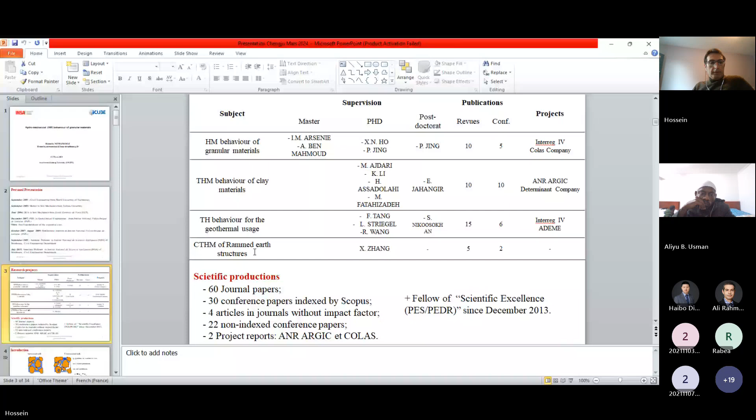So generally, coming back to my field of research, it's going to be around geomaterials, and as I told you, it's the thermo-hydromechanical coupling work. It should be mentioned that because of the interactions soil has with the environment and with structures, we can imagine the soil changes its state several times, moving from saturated to unsaturated state. The reason I'm doing all these couplings is because the soil is not going to remain at one state in its whole life, and these changes are going to be coupled.

If it's on the pavement, you can imagine vehicles passing through the pavement structure, rainy times with precipitation, or thermal variation all over the life of the soil. So if I'm imagining this soil is part of a pavement, I need to consider the hydromechanical behavior of the granular material. If it's part of an individual building with foundation inside clay soil, it's the hydromechanical behavior of clay soil. And if I'm using the same soil for energy storage methods, for example geothermal usage, it's the hydrothermal behavior. So it depends on the field, the demand, the subject we are treating - it's possible we don't need to consider the total thermo-hydromechanical coupled problem, so we choose one part.

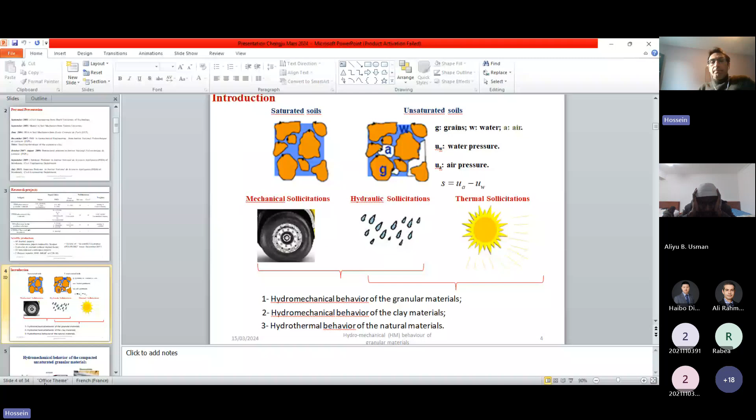So mainly for what I'm going to present today, I'm going to stay with the hydromechanical behavior of the granular material, so we're going to stay majorly on the pavement.

This slide, even though written in French, should speak to you, because in the pavement structure you have the first layer which is the asphalt layer, then going down you have the base layer, and if you want, the sub-base or sub-grade layer. Generally, this is the main idea of my presentation: you see problems mainly on the asphalt surface layer - rutting or surface cracking - and mainly you'd say this is because of the surface.

But truly, maybe it's not only because of the asphalt layer, but it can come also from the base or sub-base layer. Especially I'm talking about this water level that you can see, because of the rain that is arriving, no matter if you imagine your asphalt layer is permeable or impermeable, by the other side finally you can change the water level.

And if I'm going to put this water level up or down, you can imagine that you are changing the water content or the water state of your granular material. This is exactly what I want to talk about.

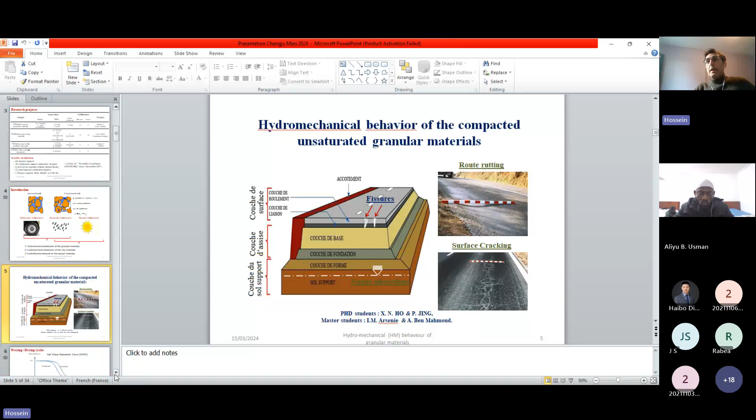So in this presentation, I'm going to show some works that we have done on this field, and it can help you to see at the end what I mean by all of these changes, and how we can consider it in the laboratory and then in the real scale, these changes of hydraulic behavior of the soil that are attached to the mechanical part.

So let's start the presentation.

For the first slide, maybe you know it, maybe you don't, but I need to start my presentation with this fact that the water content of the soil is changing all the time. This is related to something we call in the field of unsaturated soil, suction, the negative pore pressure. So it means that if your soil is saturated, you are somewhere here...

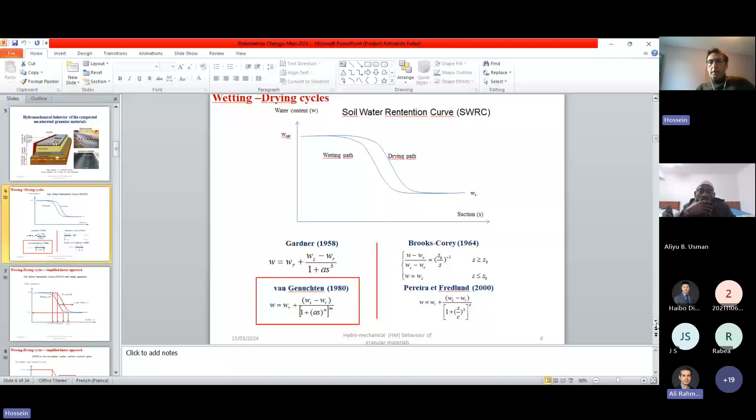Can you see my presentation or not? Just I need your... Yes Hossein, yeah we can see, although it's not the full slide, but we can see, yes. Okay so full screen, yes.

Now it's fine. So I'm saying that this water retention curve, the variation of water content with the suction, you can see that we are on the saturated state, and if we put the soil through its dried condition, you can imagine that you are moving first maybe on the drying path.

Another issue I want to talk about is that you may have something like a hysteresis phenomenon, where there is a difference between your drying path and your wetting path. It means that if I'm in winter and going through summer, I'm going to be on the drying path. But if I'm in summer going through winter, I'm going to be on the wetting path. So as all the seasons pass, the soil is also not going to follow the same wetting and drying path.

One point we need to consider, and this is the major difference between reality and what we do in the experimental laboratory, is that we do the things fully. But what I mean by fully is that you start fully from the saturated state and you finish by totally dried condition, and vice versa, you start from totally dried condition and finish by totally saturated state.

This is the main hypothesis I'm going to use, the extreme condition that I may have, because in reality maybe you are not totally dried or totally saturated. So you are going to be somewhere between these two, turning around between the wetting and drying paths in the middle of this path. So we are putting ourselves, when we do the things in laboratory scale, in the extreme conditions. So we may say that if it happens in reality in these extreme conditions, we may have such a problem later.

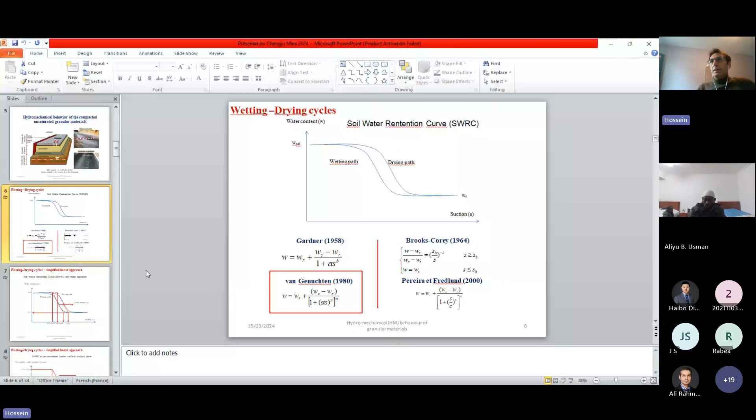But what I'm going to change in my work is that I'm going to take this water retention curve that we know very well in the literature, and I'm going to apply something like my own approach, my personal approach to this curve. There is a reason behind this. You will see a little bit later why I need to change, to modify things in this approach, especially for the granular material. So I know my curve on the wetting and on the drying path, especially I can

fit it, as I told you, with the Van Genuchten equation, or no matter the equation that you may need. But I changed this nonlinear variation to something like what I will call the linear approach. So instead of having the nonlinear curve, you will see that I'm going to replace my SWRC by three lines, three linear parts.

The first is for the saturated states. Then I have a very, let's say, steep slope here, that is going to be the major part of my SWRC, and then I will reach the residual state, and that's going to be the final state. So I'm going to divide my nonlinear curve into three lines for each step.

So the intersection of each part, I may need to define it. I will use something like S star to denote the intersection of the first and the second part, and I'm going to use SR, another letter, to define the intersection of the second part with the third part. And as you know, I am on the wetting and I am on the drying path.

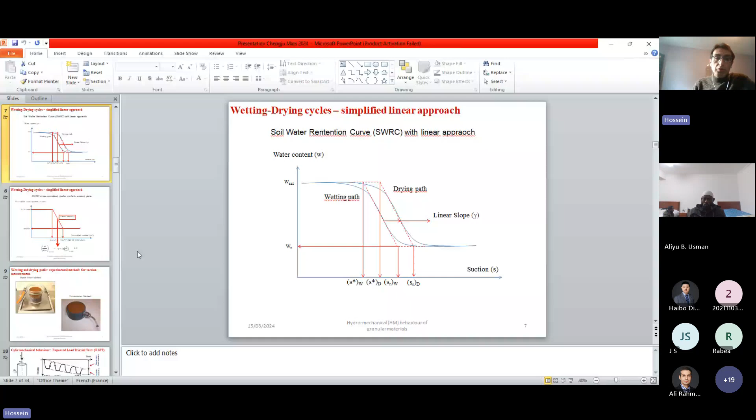Because if I'm going to replace my nonlinear curve of SWRC by three lines, and I'm going to change my representation curve to normalized water content based on normalized suction that is divided by S star, you can see that both curves of wetting and drying paths, they exist, the hysteresis exists. But if I change the representation to another plane, and I use normalized water content with the normalized suction, these two different paths, these two different curves, become unique in this plane, the normalized water content versus the normalized suction.

I know that you are good in math. You need to write your equation. It is a linear approach in logarithmic scale. And so your equation, especially this is constant, but I'm talking about this slope. You may need a linear slope that is going to come out from here. And so you can relate your normalized water content to your normalized suction with a slope that is called gamma. And so you write your equation, and it seems that with one parameter gamma, I am able to reproduce my water retention curve.

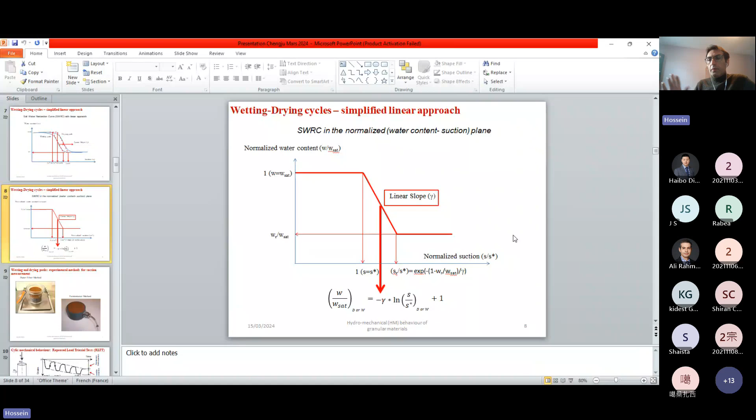And especially what is amazing about this approach is that you have one unique curve for the wetting and for the drying paths. Is it fine for now? Is there any question or not?

Is it fine? I don't see my Teams. Can you hear me? Yes, we can hear you, Hossein. Yes, we can hear you clearly and your slide. Yes. Okay, so is there any question? I may go to the next step.

And so if I have my theoretical approach, now we go to the laboratory and we do some measurements. The objective of this part is to show you that maybe my approach is going to predict the things well, and it can explain the hydromechanical behavior of my granular material. So I'm at the laboratory scale and I need to fabricate the samples to measure my SWRC. As I told you, I need to have some experimental results. Then I'm going to fit them with Van Genuchten and I'm going to replace the Van Genuchten equation by my linear approach. So I use these two methods and you will see the results that are going to be presented a little bit later.

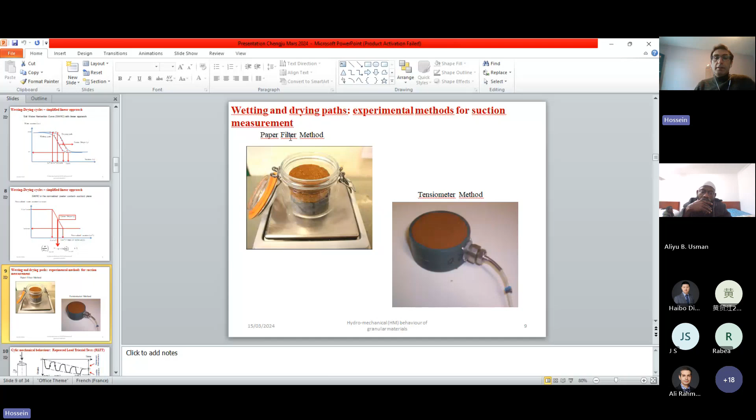This is for the SWRC, and we should not forget that another major point of this presentation is the hydromechanical behavior. So after, I'm going to fabricate the different samples at the laboratory scale for the triaxial test. I don't know whether you know this test or not, but we are able to do the repeated loading triaxial test. We can cycle our samples axially and radially in the triaxial condition.

Two behaviors are mainly known because of the loading of the cars on the pavement. It is supposed to be cyclic loading, and so this deformation is going to be plastic, the permanent deformation. You are going to have stabilization after several cycles. And there is another part of behavior: after several years, after several cycles, the granular material is going to show a reversible behavior. You load and unload your soil, it comes back to the same point, and the behavior becomes elastic or reversible.

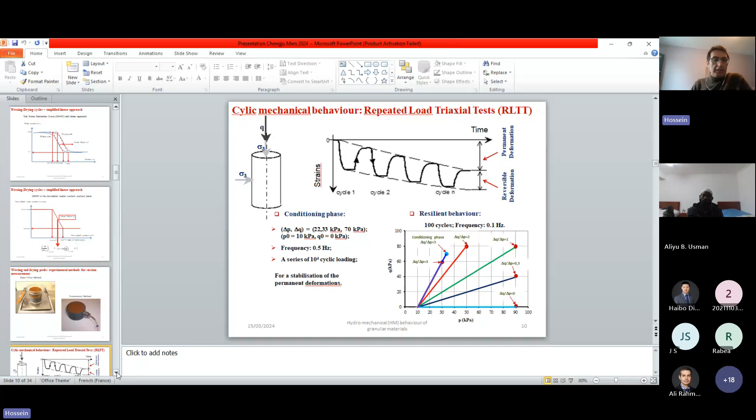The material that I'm using is a material in France that we know. Mainly, it is used for the subgrade soil. It is coming from the Missillac region, and it is the sand that we know very well in our laboratory. The maximum grain size is less than 31.5 millimeters.

The fine content that I'm going to show you is changing, because each time the material was sent to us, we did again, let's say, the geotechnical investigation on it, and so it happened that in 2 receptions of material we had 2 different fine contents. This was not what we were expecting, but it opened up having 2 different materials, and all the results that I'm going to show you come from 2 different times that the material was sent to us, and so we had 2 different materials with 2 different fine contents.

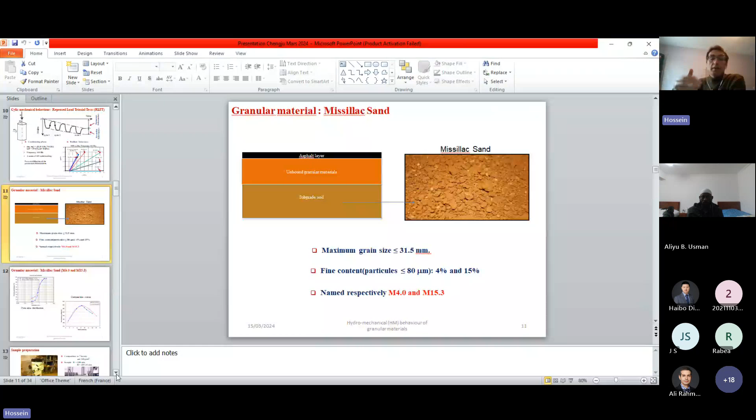First, I'm going to call the material with 4% of fines M4, and the second material, the exact fine content was 15.3. So you will see in parallel 2 different materials with 2 different fine contents, and the hydromechanical variation. Another point to show is the pore size distribution of the 2 granular materials, the 15.3 or 15% of fines, and the second is going to be M4 with 4% of fines.

Another curve that I can show you is the compaction curve, the variation of the dry density with the water content with the optimum point. This optimum point is important because it's going to be our referential initial state that I'm going to use in the other slides. So something like around 2 megagrams per meter cube or 2000 kilograms per meter cube is going to be our optimum dry density. And another point that maybe I'm going to come back to is the optimum water content. It's around, let's say, between 9 and 10, somewhere here. You will see that the material behavior is also going to be dependent on this optimum water content later.

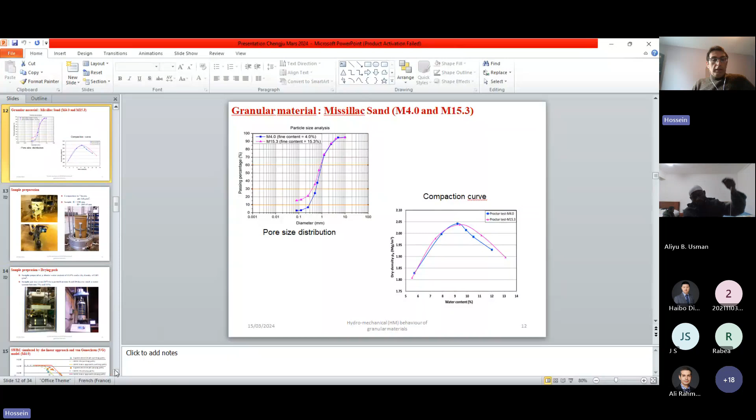So I need to fabricate, to prepare my samples at the laboratory scale. When I do the triaxial test, I need something like 150 millimeters or 15 centimeters of diameter and something like 30 centimeters of height. It's a big sample that I'm going to use for my hydromechanical behavior. The material should be compacted in 7 layers. It should be mixed well with the water, as I'm changing the water content. So I need to prepare several samples, and it was not easy to prepare the samples each time, so it was very time consuming.

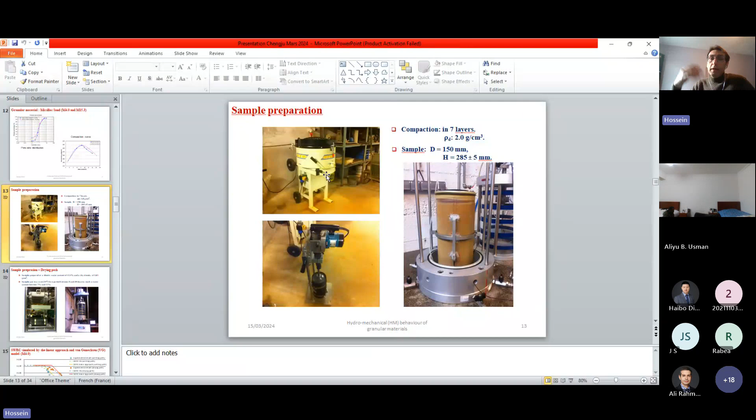And all of the things that I'm telling you are about the wetting path, and if I want to do it on the drying path, it is even more time consuming, because I need to prepare all the samples first at a water content around my saturated state, which is 12.3 in this work, with the dry density, as I told you, around 2 grams per centimeter cube or 2 megagrams per meter cube. And then I need to wait around 1 week to 3 weeks to dry back my samples, because I'm on the drying path, and to dry them we use an oven at 35 degrees to come back to a water content between 7 and 11. So for the wetting it was easier and faster, and for the drying we needed to wait between 1 and 3 weeks to have our final samples.

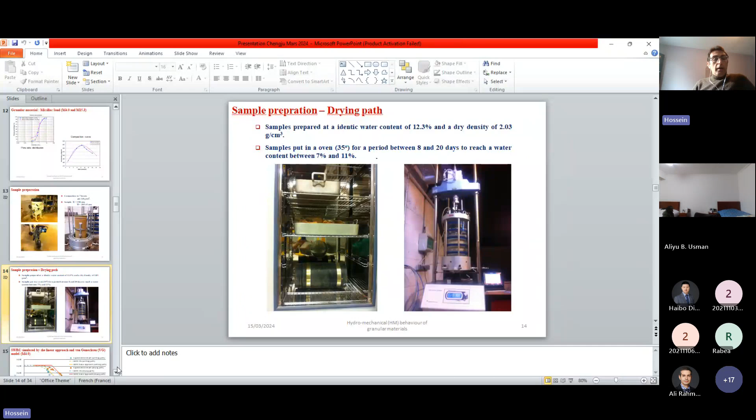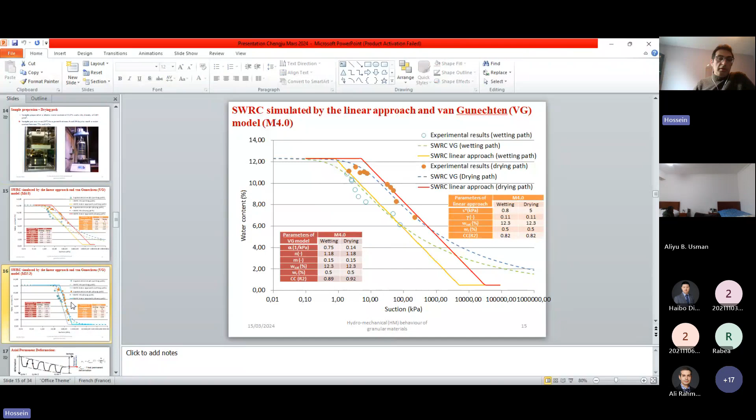This was the results for M4. I can do the same thing for the other soil with the fine content of 15.3, and so you can see the same: the experimental results, the approach with the Van Genuchten curve, and then the replacement with the linear approach, and you have also the gamma parameter, the main parameter that I use for my simulation. Another point also is that we are almost in the same range of accuracy for the Van Genuchten and linear approach. So even with the linear approach, for some curves we may have a better approximation.

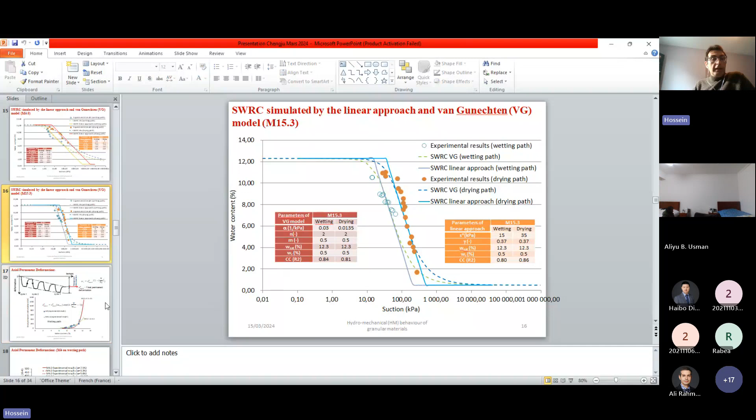Then the other stage is the mechanical behavior, which is coupled with the hydraulic state. As I told you, I'm going to divide my presentation in two parts. First, I'm going to talk about the permanent deformation, the stabilization after 10,000 cycles, this part. I need epsilon p max for the different water contents. For the rest of my curve, the variation with the number of cycles, I need a parameter f that I fixed for all of my curves. So this part of the equation will not be modified hugely in my simulations, but I need epsilon p max, which is dependent on water content.

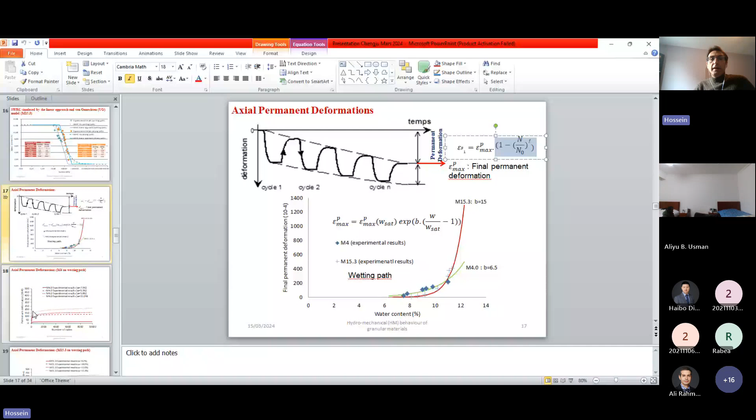Now stay again on the wetting path. This is the variation of permanent deformation. The stabilized state, this was the epsilon P max that I have shown you before. Now we have the variation of the curve with the number of cycles. This part of the curve that I told you is constant, I need to define the parameter f for all of the samples, and I can have this variation with the number of cycles. f was considered constant for all of the samples.

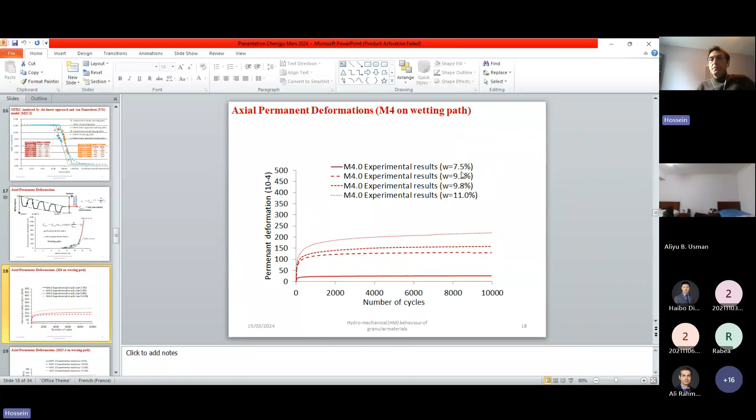So these are some experimental results, the variation of permanent deformation with the water content and the number of cycles. And I'm going to show the same results also for 15.3. I am on the wetting path for now. The difference of behavior, as I told you, for the lower water content, the permanent deformation of M4 is higher than M15.3. All of the things that I have told you, you can also see in this slide.

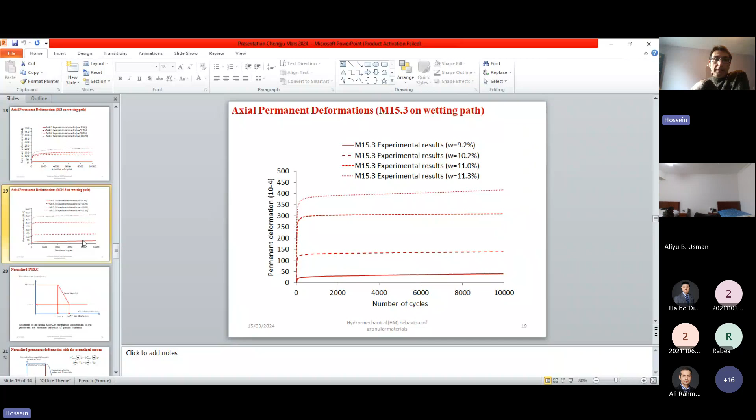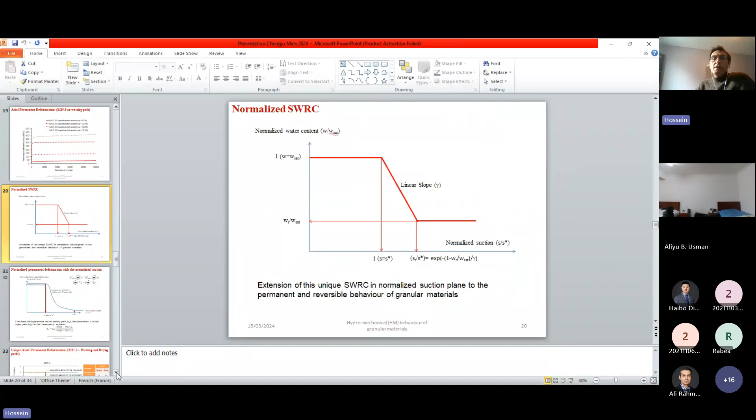Now I have my mechanical behavior, my permanent deformation behavior on the wetting path. As I told you, I want to do hydromechanical coupling, and another point was the behavior on the drying path. Now I want to find out what's happening on the drying path. And for this, I will remind you again of the linear approach that I proposed at the beginning of my presentation. It was the normalized water content on the plane of normalized suction, which becomes unique for both wetting and drying paths. And so we had a unique curve with a unique slope gamma that I defined before experimentally.

And so what I'm going to use is that my curve is unique in this normalized plane. If I change my plane to another normalized plane, which is now the normalized permanent deformation changing with normalized suction, I'm going to say that it is going to be the same on this plane. It means that I'm going to have a unique curve for wetting and drying paths if I define everything in my normalized plane. This time it's going to be the normalized permanent deformation based on normalized suction.

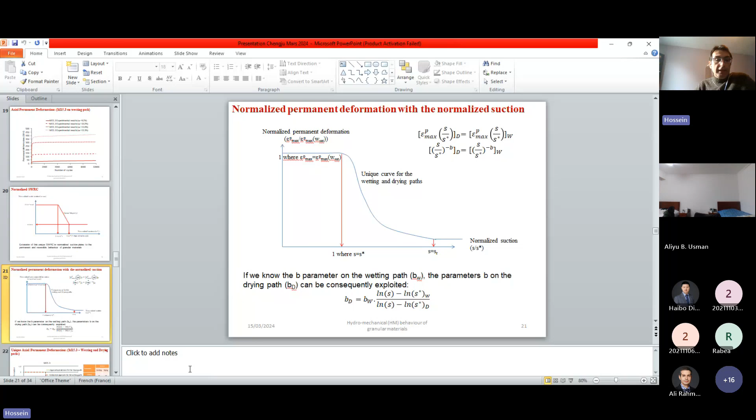Already I have shown you all of the things happening on the wetting paths. So I have this curve of normalized permanent deformation varying with normalized suction on the wetting path. And the objective is, by writing some simple equations, to take everything happening on the wetting path and define it on the drying path. And if I write my equation, I can see that if I know my B that I have shown you before on the wetting path, I am able to define my B on the drying path. And so if I have the behavior on one path, I'm able to define it on the other paths. And this is what I'm going to show you later.

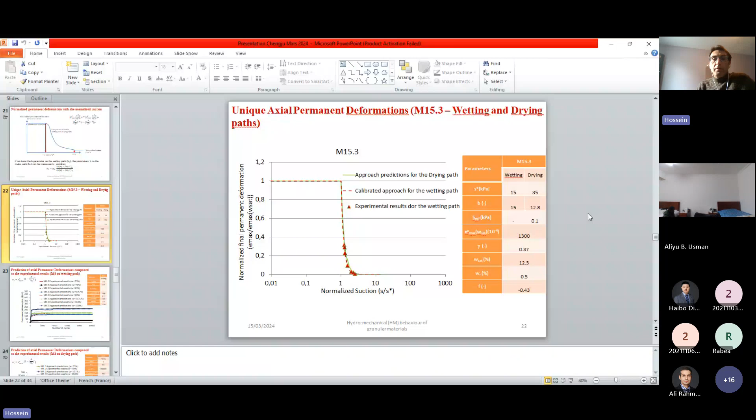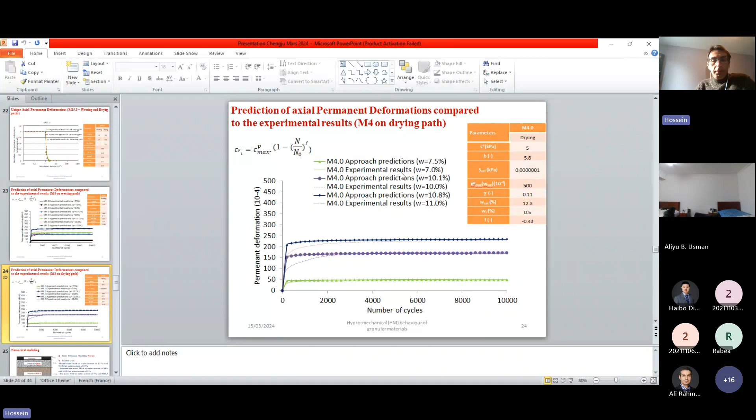And maybe 11, 10.8, there is a difference. I have the error, but let's say that the predictions are good. And especially what is important is the next slide, that I am able also to predict my results on the drying paths. I have almost the same differences that I have on the wetting, but the results on the drying paths are also acceptable with this linear approach, and so I'm able to predict things on the drying paths.

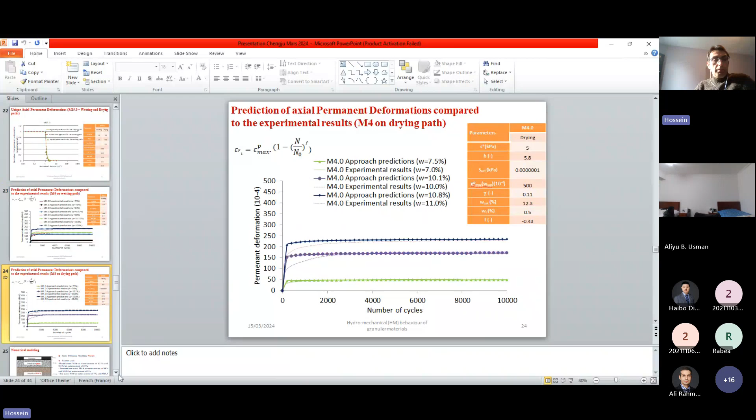And so you can see that I need to calibrate some equations, and each time I'm able to have the results on the other paths. So all the time we have the analytical solution: I have my linear approach, I have my model of variation. There is another approach that I like to do. When I do the laboratory scale test, I use some analytical solution to define the behavior. And I think for the last stage, it is not bad, if you have some easily provided equations, to inject them in a code and do some numerical simulation.

And for this part, maybe it's somehow hypothetical, but let's say that we are in the real scale case, with a pavement constructed with these two soils that I have shown you, M4 for the base layer, and M15.3 for the subgrade soil. The asphalt layer was considered to have linear elastic behavior with the thickness that you can see. So the main difference is going to be the water content of the granular material and subgrade material, which change over time.

If we are in the humid state in winter, I suppose that the water content of M4 is close to saturation, and M15.3, because it's deeper, is close to the optimum point. We have an intermediate state with a water content of 10 or 9% for M4 and M15.3. And in dry conditions, summer, we have 7% water content for M4 and 8% for M15.3. The variation of water content for M15.3 is less than M4. M4 is closer to the environment, the top surface, and M15.3 is at the bottom, so we have less variation of water content.

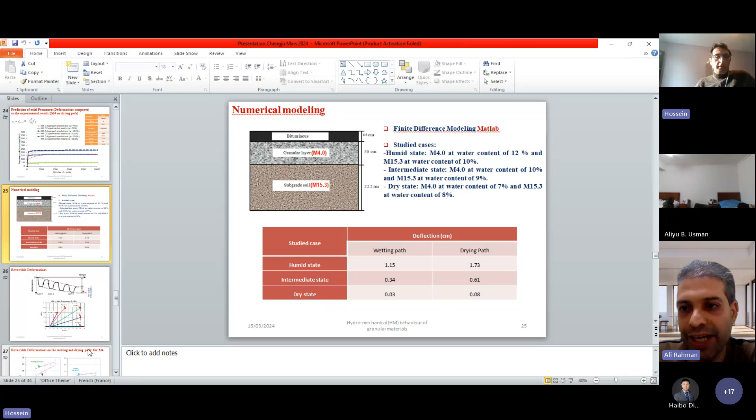Okay. So this was the first part, the permanent deformation. Now let's talk about the reversible behavior. I'm not going to detail it the same way. You will see almost the same results, the same mechanical and hydraulic effect that I want to show you. I am on the wetting and drying paths. The main idea is going to be the same, to show you that I have hysteresis.

I have the difference between wetting and drying paths, and I will obtain the same difference at the end for also the reversible deformation. The only difference is that I have more results because the frequency is lower. I can do it on the different stress paths that I was not able to do for the permanent part. Now I have more experimental results.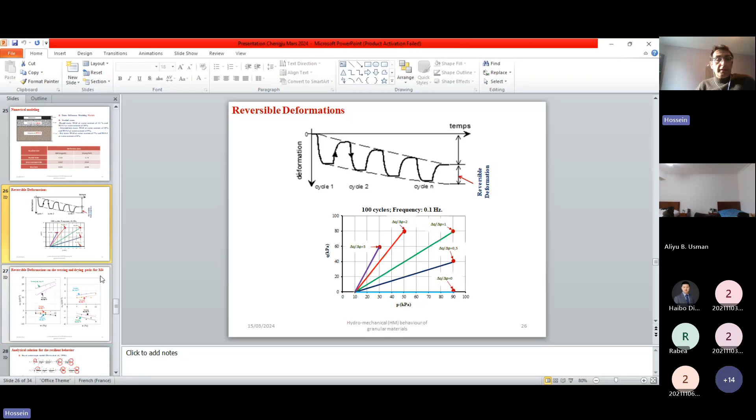The first slide shows wetting, drying, different stress paths. I have this extreme variation that you can see for the different soil. It is for M4. I can do the same for M15.3 if you want. There is a variation of deformation on the wetting and drying paths.

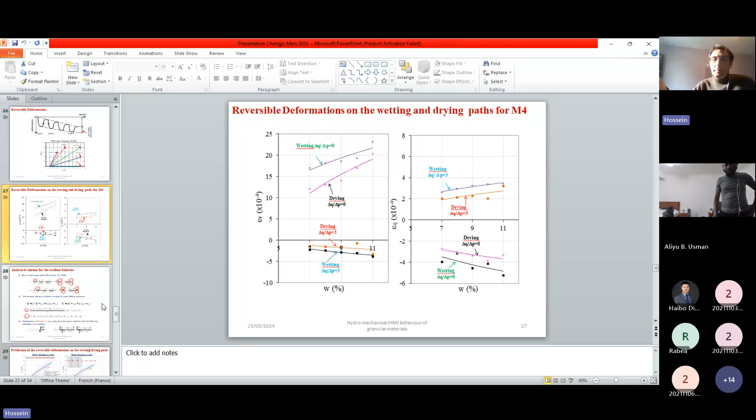Another good point is that for the reversible behavior, I can have the volumetric strain and the deviatoric strain. So I have even more information to show for the reversible behavior, including the variation of deformation with water content at the different stress paths. This is the coupled hydromechanical behavior that I wanted to show you, and I'm able to define them. For this part, I'm going to use another theoretical approach.

I'm not going to use my linear approach, because I already have a very good model for the reversible behavior, the Boyce model, which is developed so I'm able to define the volumetric and deviatoric strain with the stress paths that I have used. I use the concept of effective stress if you want.

There are some parameters to be fitted, and so I am able, just briefly, to define also the reversible behavior, the effect of the hydromechanical coupled problem, especially on the drying and wetting paths. I am able to almost explain all of the things that I have done for the permanent deformation, again for the reversible behavior.

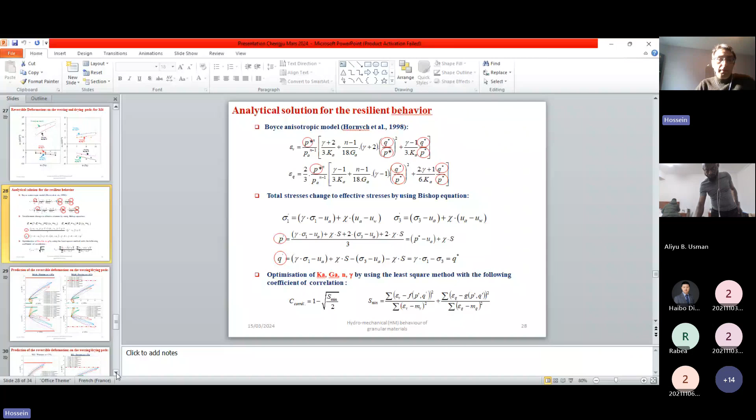Some comparisons to give more credit to what I have told you on the wetting and drying. One water content is going to be 11%. You can see all of the calibrations compared to the experimental results. This slide shows everything done on the wetting and drying, for the 11% water content and M4 material.

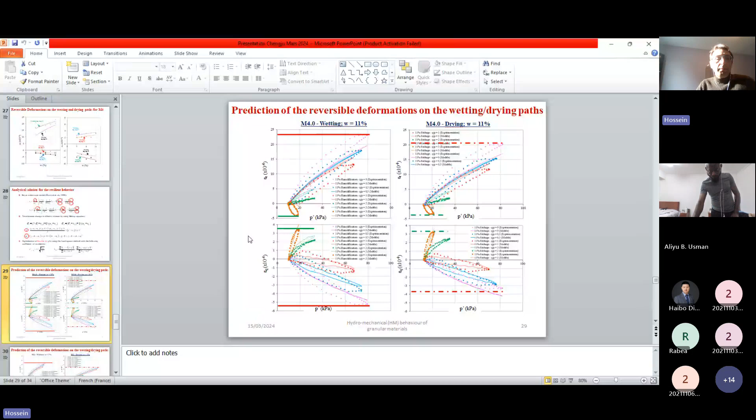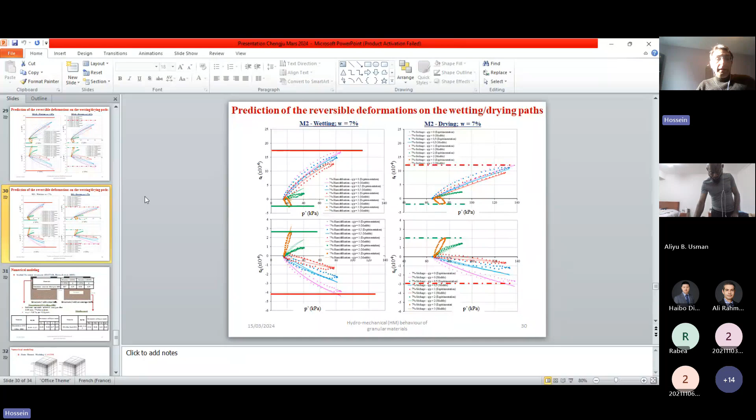I can show you the same also for another water content, 7%. This time again for M4 material - there's a mistake here, M4 material - so I have the same results for material M4 at water content of 7%. Then I'm going to use these to calibrate with the Boyce model that I have shown you. The next step is to inject my equation inside the code.

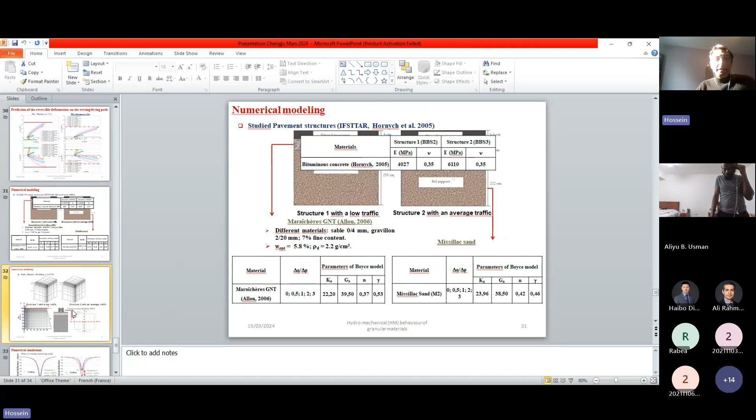This time I have used another structure, UGM, the unbound granular material. I don't know whether you know it - it was used for the granular layer, for the base layer, and then for the subgrade, it is the M2 material that we used for 2 types of pavement. We know all of the parameters for the reversible behavior of this material, which is going to be modified by water content, the mesh, the geometry, the loading, and all of the things you need for a numerical simulation.

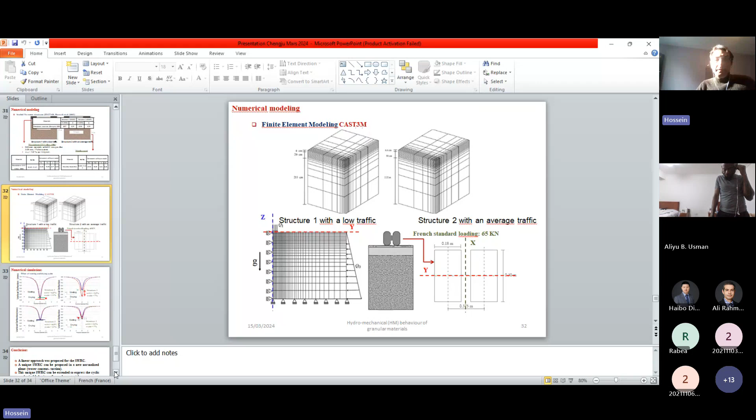We have used the CAST3M software for this simulation. And I finished my presentation as I promised.

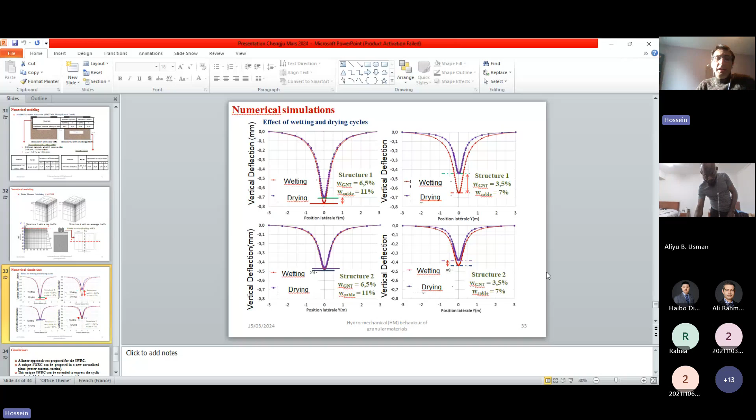So, from all of the things I have told you, I conclude that the soil is important, but don't forget the effect of the structure, the layers that you put, and how you combine these layers. Finally, there are some structures that are more affected by the hysteresis, and there are structures that are less affected by hysteresis. And I will conclude the same - a linear approach that I proposed.

It was defined first for the permanent deformation, and the reason was to present a unique curve of SWRC that is going to be used to express also the permanent deformation. Almost the same base was used also for the reversible behavior of the pavement of the granular material used in pavement structure.

Another thing I like to do in all of my research work is that once you have a good analytical solution, once you know your material very well, don't hesitate to do some numerical simulations to express what you've found in the laboratory or analytically, to show it numerically also and bring more information. The numerical simulations are interesting because you can see several cases that are generally hard to study experimentally, so you can express them with numerical simulation. There are cases that may be impossible to do experimentally, where you can bring some answers numerically. So this is the advantage, the power of numerical simulations.

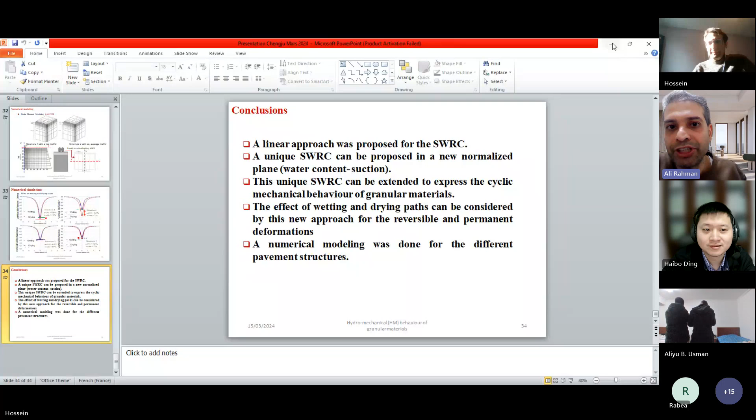And yes, Haibo, please. Thank you. Okay, hello Hossein. Yeah, hello. Very nice to meet you, and very good presentation. I have one simple question.

Because you did some research on different water or different water content, have you considered the freeze and thaw soil behavior of the granular material on the deformation, or some cracking behavior of a pavement, the freeze and thaw behavior of this?

Actually, for the cracking, the cracking of the soil, the cracking of asphalt layer is somehow different from the soil. The granular material studied in our work is supposed not to really crack, let's say. It's not in the family of soil considered to be cracking soil, okay? So if I add more fine content, if I change my soil to something like that, going toward silty soil or clay soil, yes, you're right, I may need to take into account the cracking part. But for these granular materials shown and studied in this work, they are not in the category of soil that shows a huge potential of cracking over time.

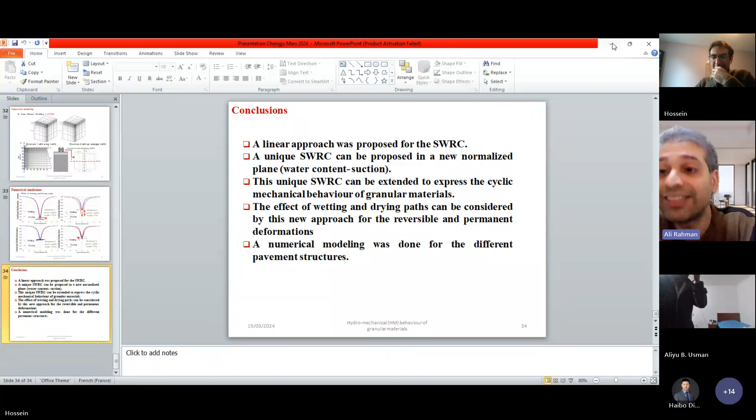What we can do in our pavements relating to subgrade, which is a very important thing, the foundation of the pavement. If you have any problem related to soil, it would be a pleasure, we can work together. Of course, I'm looking forward to that. I am in, let's say. Thank you, I appreciate your approach.

Okay, so any other questions? Although we're out of time, no questions from the audience.